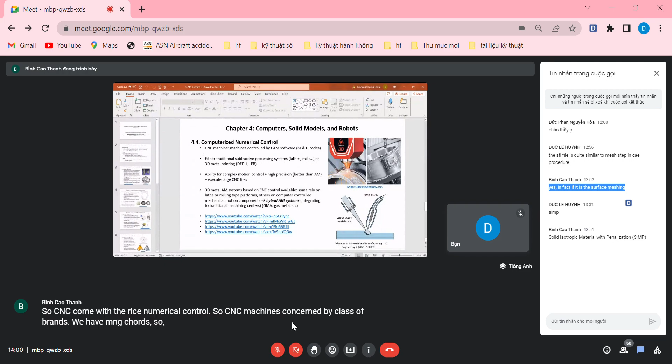So CNC, computerized numerical control. So CNC machines are controlled by CAM software. So we have M and G codes. So either traditional subtractive processing like lathe, mill, cutting, or 3D metal printing with directed energy deposition, laser or electron beam. So I just want to find an example for you.

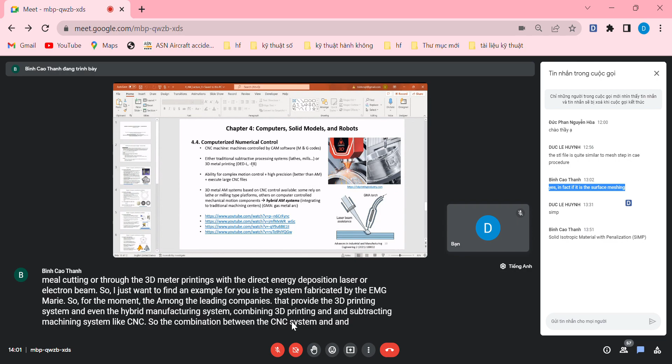This is the system fabricated by DMG Mori. So for the moment, they are among the leading companies that provide 3D printing systems, and even hybrid manufacturing systems combining 3D printing and subtractive machining like CNC. So the combination of the CNC system and the 3D printing system in one system only. That can be offered by DMG Mori in Germany.

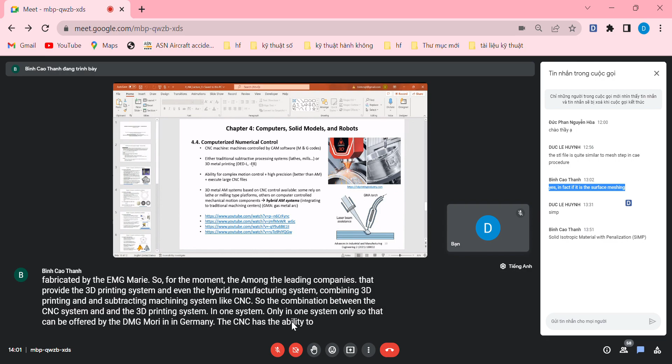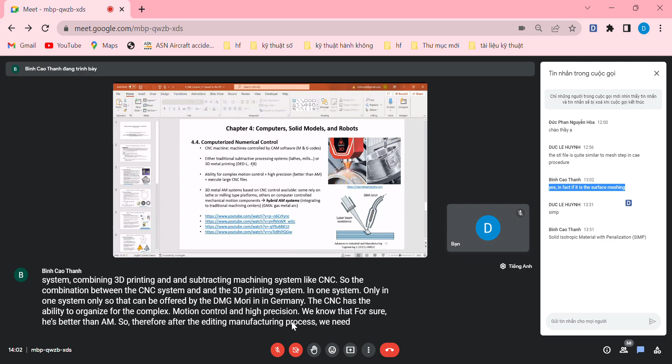The CNC has the ability for complex motion control and high precision. We know that for sure it is better than AM. So therefore, after the additive manufacturing process, we need post machining with the CNC. And it has the ability to execute large CNC files.

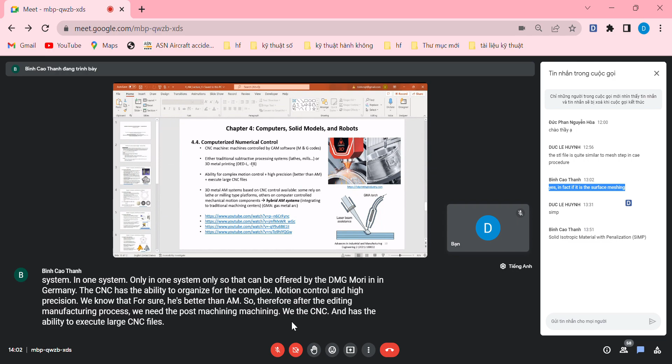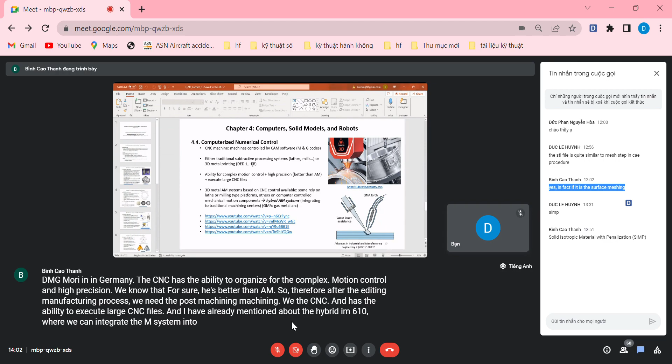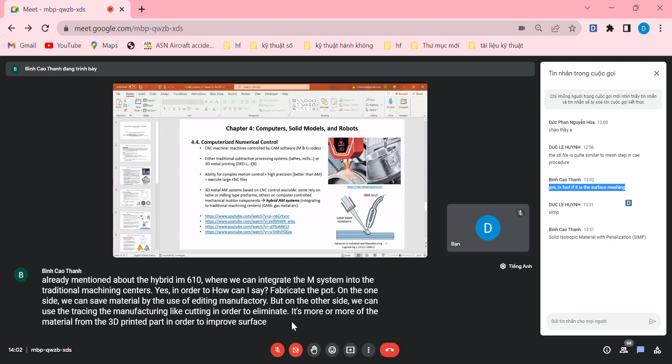And I have already mentioned the hybrid AM system, where we can integrate the AM system into traditional machining centers in order to fabricate the part. On the one side, we can save material by the use of additive manufacturing, but on the other side, we can use traditional manufacturing like cutting in order to eliminate a small amount of material from the 3D printed part in order to improve the surface quality of the fabricated parts.

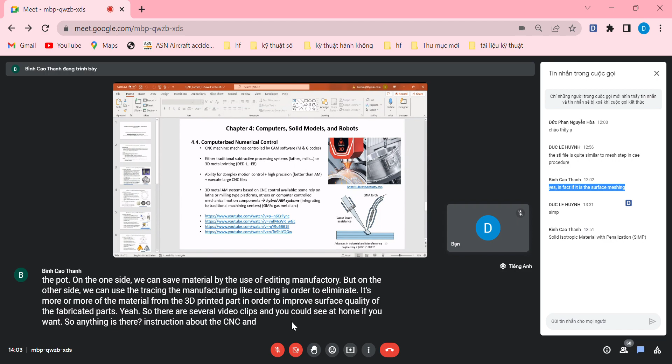Yeah, so there are several video clips you could watch at home if you want. So I think there is an introduction about CNC and probably the combination of the CNC system and additive manufacturing system in a single system.

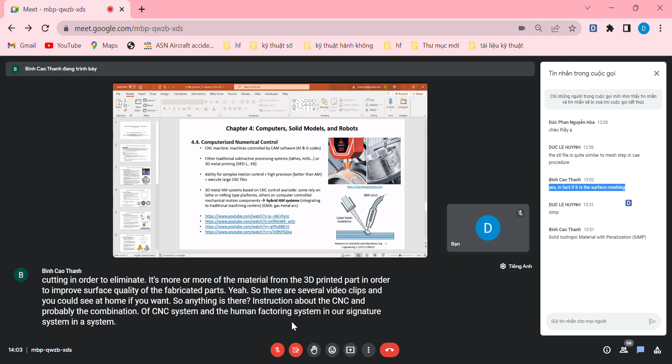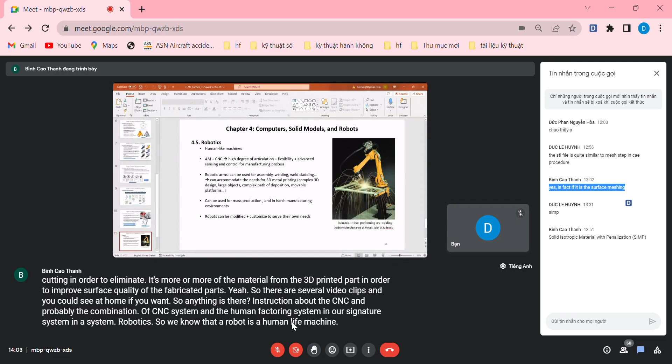Robotics. So we know that a robot is a human-like machine, because, for example, it has an arm. Yeah. So we can call them robotic arms. Yeah. The use of additive manufacturing and CNC offers a high degree of articulation.

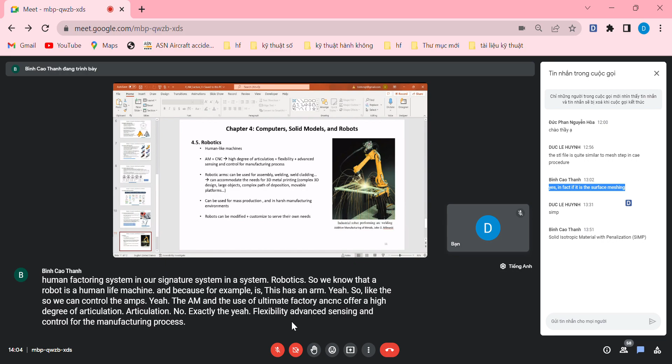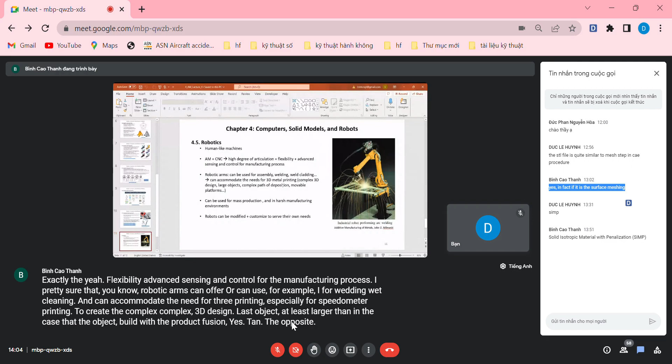Yeah. Flexibility, advanced sensing, and control for the manufacturing process. And I'm pretty sure that robotic arms can be used for assembly, for welding, cladding, and can accommodate the need for 3D printing, especially for 3D metal printing, to create complex 3D designs, large objects, at least larger than objects built with powder bed fusion. Yes, they can deposit the material for complex parts with a movable platform.

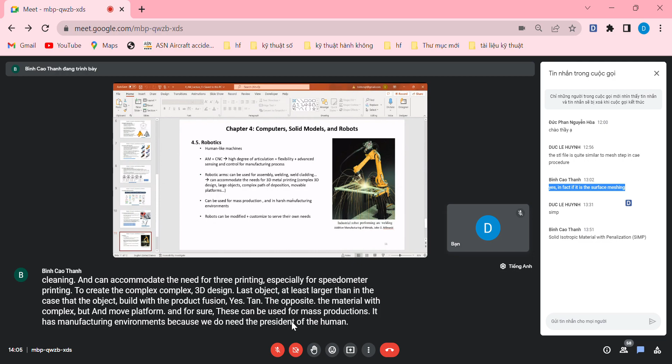And for sure, this can be used for mass production, and in harsh manufacturing environments, because we don't need the presence of the human here. The robots can be modified or customized to serve their own needs, of course. It depends on the purpose of using the robot. Yeah.

So, the last slide highlights some information regarding monitoring and real-time control. Yeah. So one of the examples I could find for you is the patent developed by Norsk Titanium, a company in Norway that used a kind of plasma as a heat source in order to melt titanium wire to deposit on the substrate to fabricate near-net-shape components for the aerospace industry.

Yes, so they have tested their product and they said that the quality of the additively manufactured parts is comparable with wrought titanium. So the properties are quite great. It's faster, it saves material, yeah. So quite suitable for contributing to shape the path toward a more sustainable future, saving materials. Save energy during the manufacturing process.

Yes, and it can create light parts. Yeah. Or improve the efficiency of fuel consumption for several types of machines or even airplanes. Hopefully, the additive manufacturing, yes,

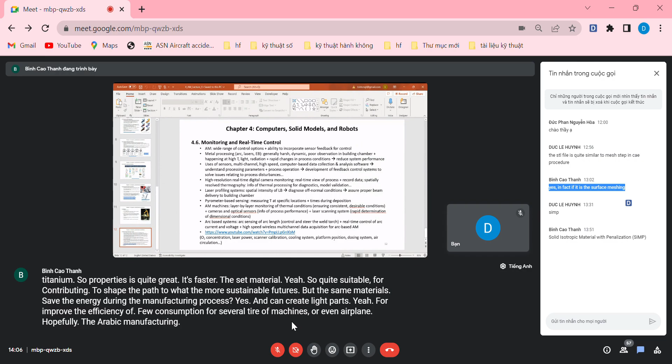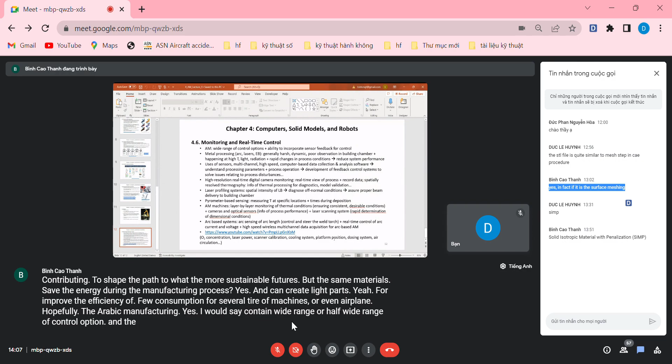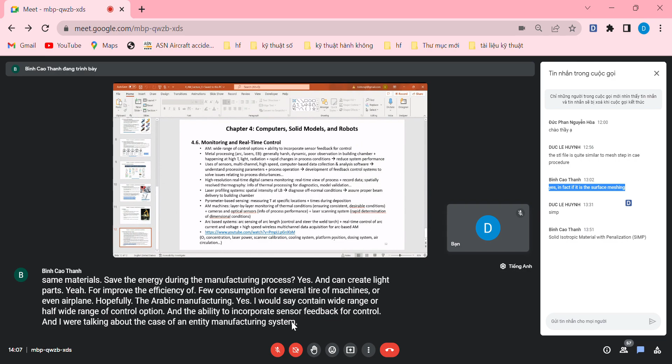I would say has a wide range of control options and the ability to incorporate sensor feedback for control. And I was talking about the case of an additive manufacturing system developed by Norsk Titanium, and their feedback system actually collects 600 data points per second. Yes, in order to control the process of printing.

So if unreasonable parameters have been detected, then the system can modify the printing parameters in order to control the quality of the part after the process. So 600 data points per second. Yeah.

The metal processing by additive manufacturing, using the heat source as an arc, laser, or electron beam, is generally harsh, so it's not friendly to humans. Dynamic, poor observation occurs at high temperatures and inside the building chamber. So how can we observe? It's generally hard to do. It's happening at high temperatures, with light, radiation, and rapid change in the process conditions, and as a result, it reduces the system performance for sure.

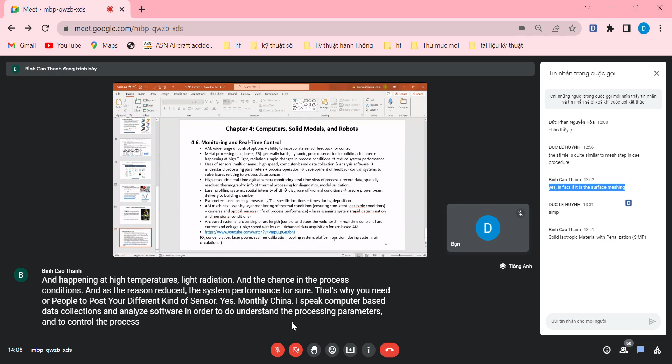That's why people propose different kinds of sensors. Yes, multi-channel high-speed computer-based data collection and analysis software in order to understand the processing parameters and to control the process operations, to overcome or solve any kind of issue regarding process disturbance, to guarantee the quality of the part.

Very understandable. They also equip the AM system with high resolution real-time digital camera monitoring, to provide real-time views of the process and record data. The laser profiling system, the pyrometer-based sensing. Yes, several types of devices are equipped in the AM system in order to monitor the process of printing.

And for the AM machines, we know that we need layer by layer monitoring of the thermal conditions. Why? I do not remember exactly, but within chapter 6 or 7, you will investigate the influence of printing parameters on whether or not you have defects inside the additively manufactured part.

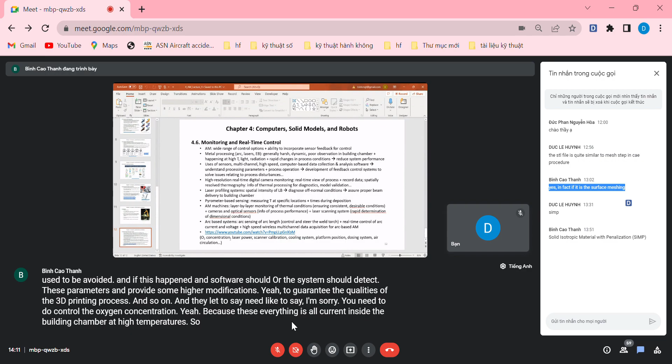And needless to say, you need to control the oxygen concentration, because everything occurs inside the building chamber at high temperature. So without the inert gas flow, it's easy to have oxidation reactions that modify the properties of the material, and you have some kind of rust, which is not good. It's a detrimental factor to the properties of the materials.

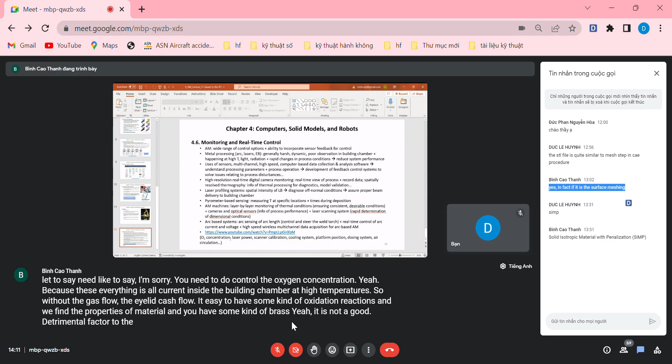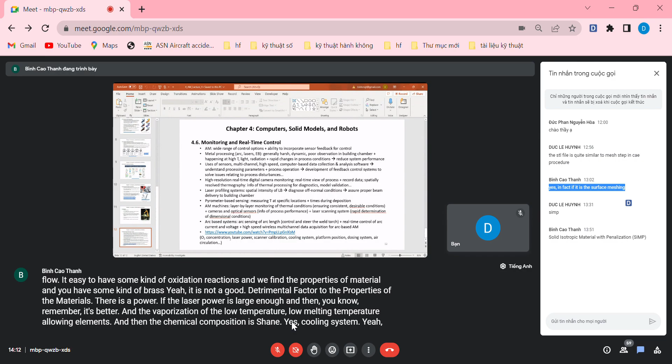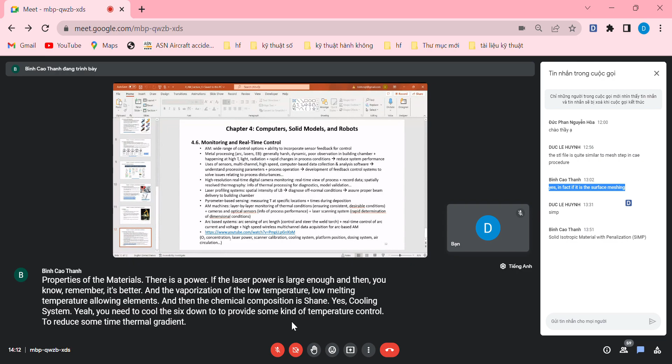Laser power. If the laser power is large enough, remember spattering and the vaporization of the low melting temperature alloying elements, and then the chemical composition is changed. Cooling system: you need to cool the system to provide temperature control, to reduce the thermal gradient. Platform position, dosing system. How to explain this for you?

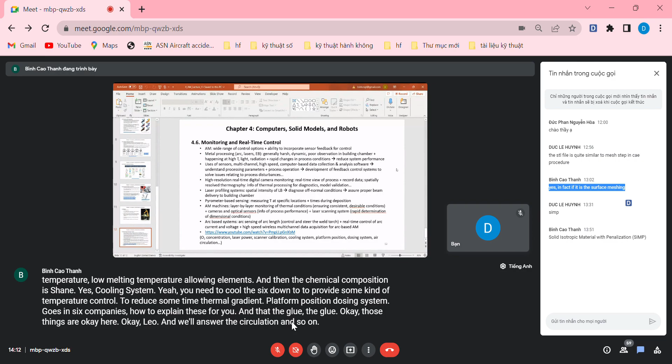So now we can start with chapter 5. I think I will try to complete half of chapter 5 today. And we have 1.5 days left. Next Thursday we have the 7th day, and on the last day we have 2 remaining teaching hours. So I think these hours are enough to complete everything that has been prepared on the slides.

By the way, do you have any questions regarding chapter 4? No? Okay. And please keep in mind that the lectures have already been uploaded on the LMS. Some can contain mistakes, and I will try to correct them as soon as possible.

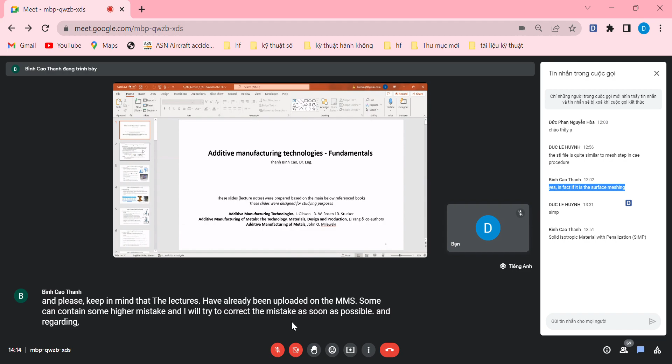Regarding the assignments that you need to complete at the end of the semester, several students have asked me about group work. I would like to remind you that it's not mandatory to do it in a group. But at least you need to define a paper to refer to together, so two students within the group need to refer to the same paper. Once you define the paper, you can work alone and you do not need to care about the other. I encourage you to work together because it's time for you to practice, but it's up to you.

The second thing: probably the class monitor already informed you, or you already read the information on the LMS. But just to remind you, in the case that one student in a group, for any reason, cannot be contacted by the other, or has already left the class, the remaining student has the right to propose the paper to refer to when writing the assignment.

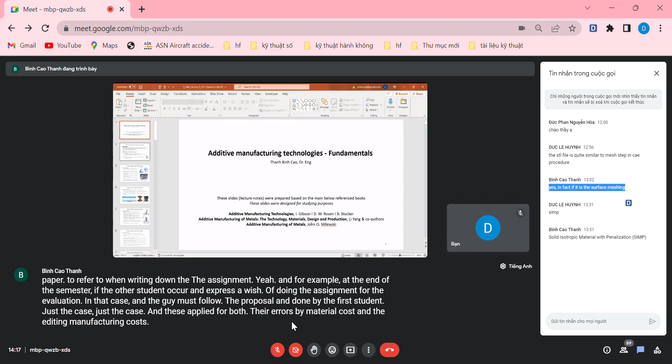And for example, at the end of the semester, if the other student occurs and expresses a wish of doing the assignment for the evaluation, in that case, the guy must follow the proposal done by the first student. Just in case. And this applies for both the aerospace material course and the additive manufacturing course as well.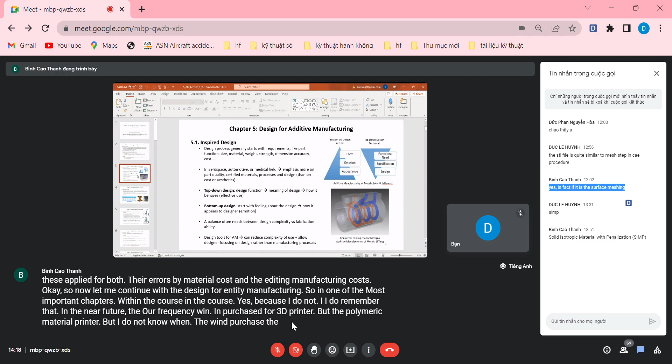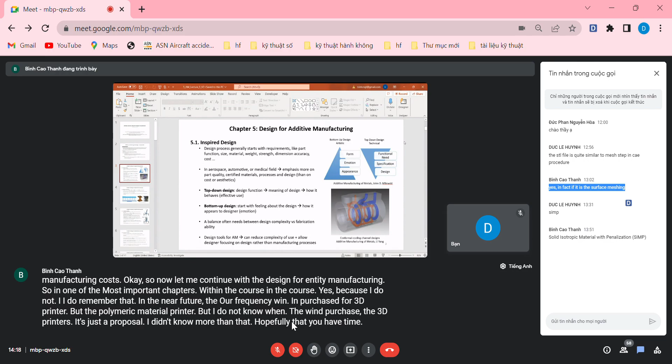I do remember that in the near future, our faculty will purchase 3D printers, but polymeric material printers. But I do not know when they will purchase the 3D printers. It's just a proposal, but I do not know more than that. Hopefully you have time before you graduate to practice somehow with the printer at school or at the academy. Hopefully, just an information.

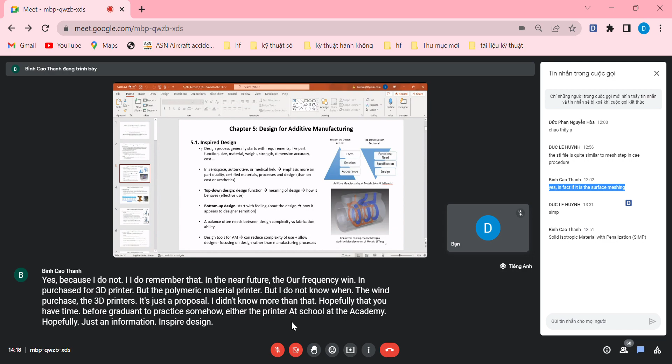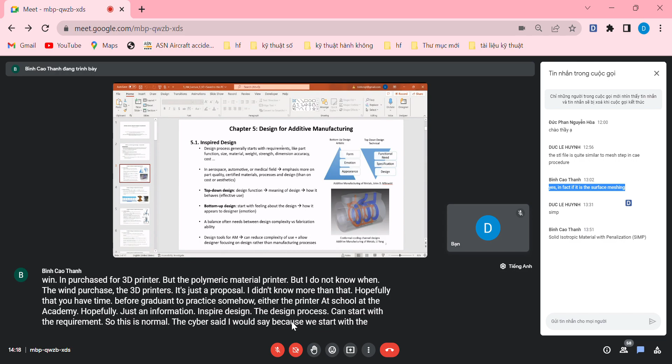Inspired design. The design process can start with the requirements. So this is a normal design process, I would say, because we start with the requirements, containing, for example, the function of the part, the size of the part, the material used to make the part, the weight, strength, dimensional accuracy, or even the cost. And based on the requirements, the designer can design the part to find out which type of geometry of the part will be appropriate.

Sorry. In the aerospace field, automotive or medical field, there is a focus on the part quality. Yes, on the certified material, the process and design, rather than on the cost or the aesthetics. Yes, because the most important thing is to guarantee the performance of the machines. And if the part is expensive...

I'm sorry, I have a call. I need to answer right now. Sorry, for a minute. Okay, here.

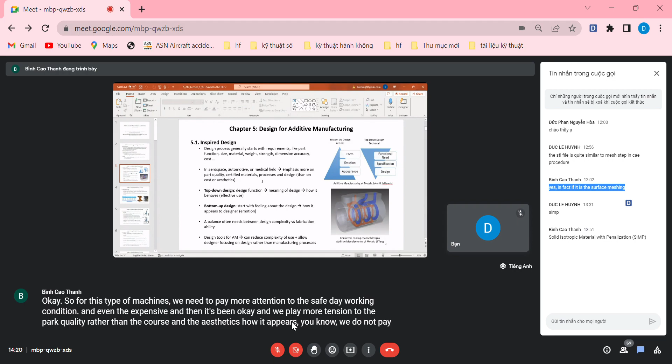So for this type of machines, we need to pay more attention to the safe working condition. And if it's expensive, then it's still okay. And we pay more attention to the part quality rather than the cost and the aesthetics, how it appears. We do not pay so much attention to the aesthetic aspect of the part.

And there are actually two approaches regarding the design process, called the top-down design and the bottom-up design. The top-down design is somehow the engineering design, because we start from the design function, meaning of design and how it behaves. So it focuses on the effective use, or the safe use and so on.

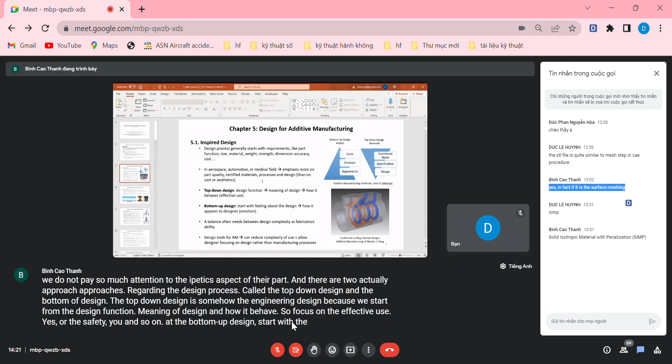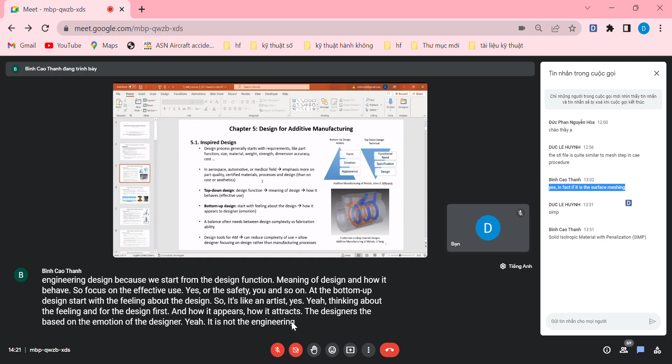The bottom-up design starts with the feeling about the design. So it's like an artist, thinking about the feeling for the design first, and how it appears, how it attracts the designers. So based on the emotion of the designer. And it's not the engineering approach actually. The engineering approach is based on the requirements, based on the function or functionality of the part. And if the part is functioning well, it's okay.

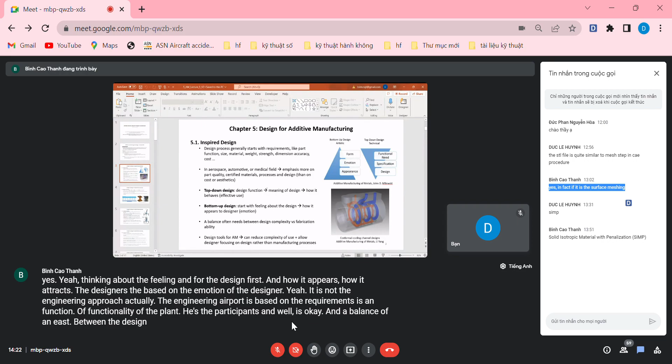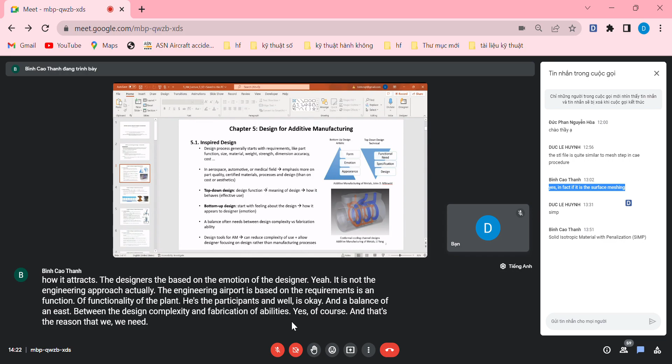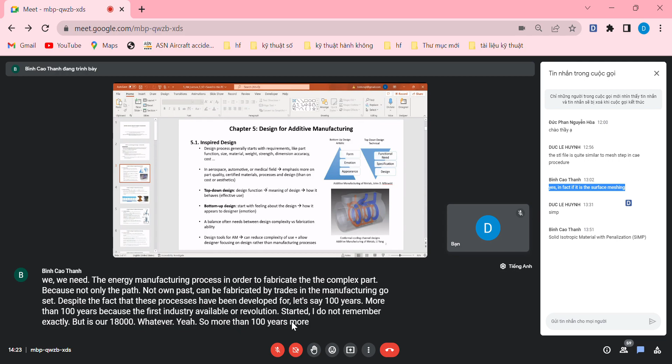And a balance is often needed between the design complexity and fabrication abilities. Yes, of course. And that's the reason that we need the additive manufacturing process in order to fabricate complex parts. Because not all parts can be fabricated by traditional manufacturing processes, despite the fact that these processes have been developed for more than 100 years. Because the first industrial revolution started, I do not remember exactly, but it's around 1800, whatever. So more than 100 years for the development of traditional manufacturing processes.

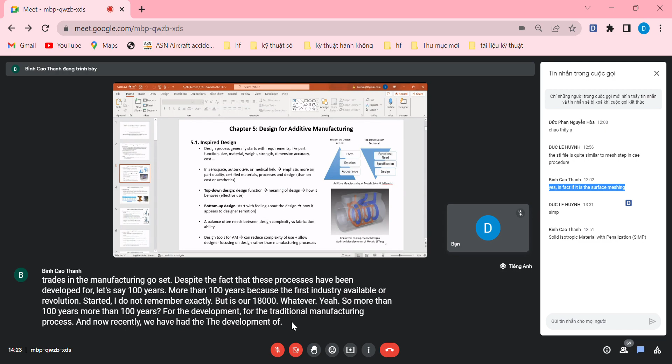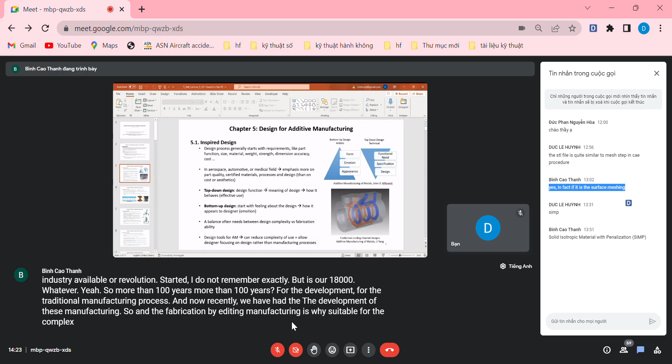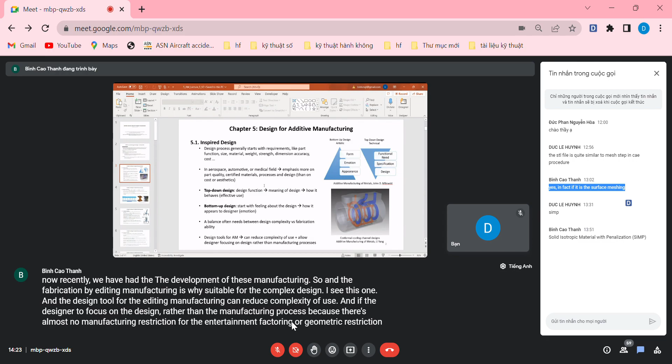And now recently we have had the development of additive manufacturing. And fabrication by additive manufacturing is quite suitable for complex design. Quite suitable. And the design tools for additive manufacturing can reduce the complexity of use and help the designer focus on their design rather than the manufacturing process, because there's almost no manufacturing restriction or geometric restriction regarding the part if the part is fabricated by additive manufacturing.

So as you can see on the right side, traditional manufacturing processes cannot be used in order to fabricate this part. Even if you use the casting process, it would be quite difficult to fabricate this type of part because it has a complex internal flow channel inside. So the drilling process cannot be used.

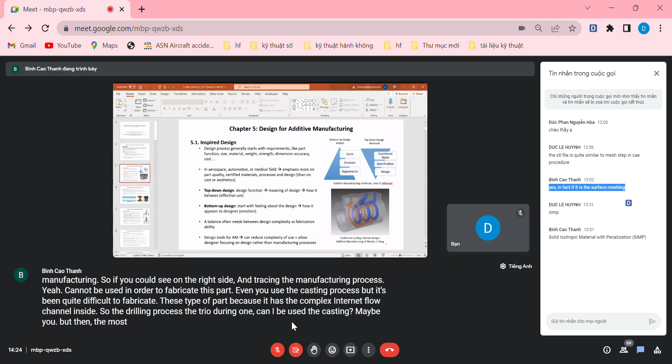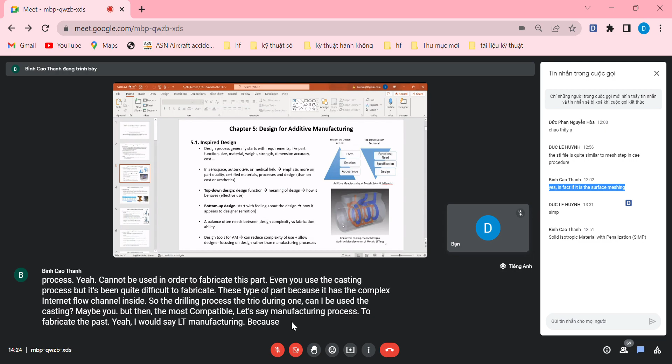Casting maybe, but the most compatible manufacturing process to fabricate the part, I would say, is additive manufacturing, because with the layer-by-layer manufacturing approach, we can fabricate the part, but then we need to pay attention to the anisotropy of the synthesized part or the fabricated part.

It needs to be carefully checked after the part is built.

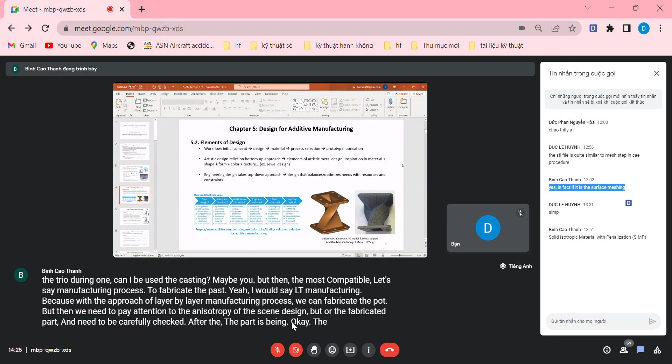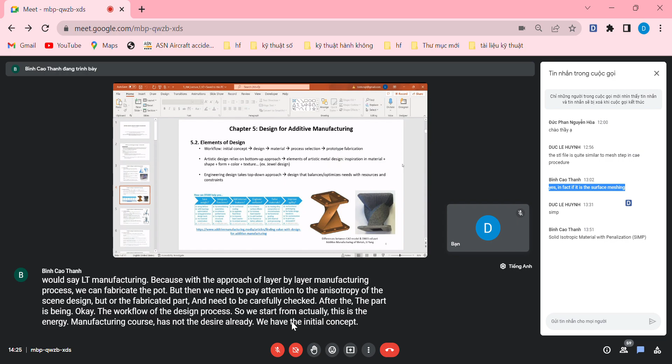Okay. The workflow of the design process. So we start from, actually this is the additive manufacturing process, not the design only. We have the initial concept. Yeah, the initial concept is quite important, and sometimes we need to draw it manually, to define the concept first, and then we start with the design, material selection, process parameter selection, and the fabrication of the prototype.

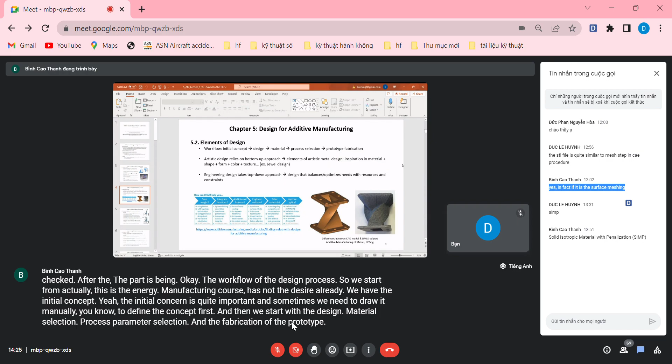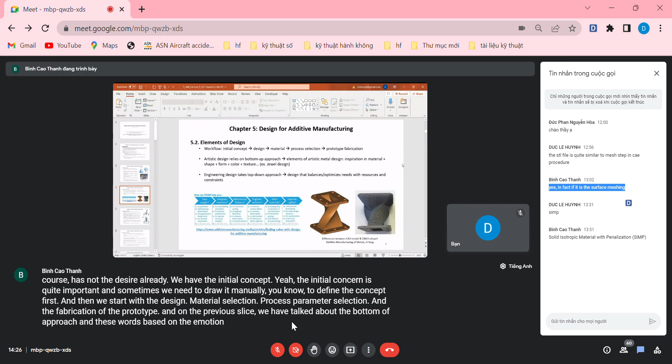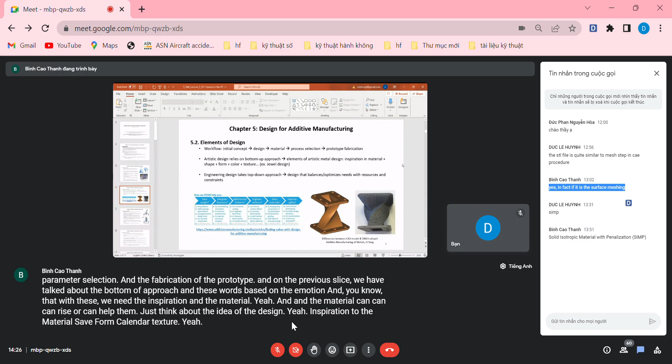And on the previous slides, we have talked about the bottom-up approach, and this was based on emotion. And you know that with this we need the inspiration of the material, and the material can help them to think about the idea of design. Yeah, inspiration of the material, shape, form, color, texture. So, for example, in the field of jewelry design.

So, engineering design relies more on the top-down approach. And we need to find balance with the resources and the constraints. And below you have some kind of flow chart. How can design for additive manufacturing help you save weight, integrate function, add internal features, engineer surfaces, tailor material, and improve agility.

And in saving weight, you can combine the design with structural optimization. We are adding lattice structures instead of using solid material, running topology optimization in order to eliminate unnecessary material, using the generative design tool.

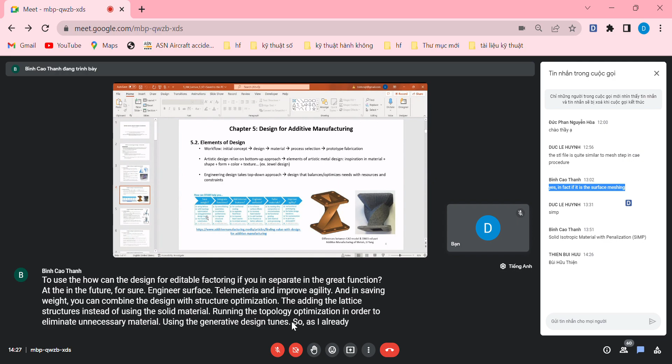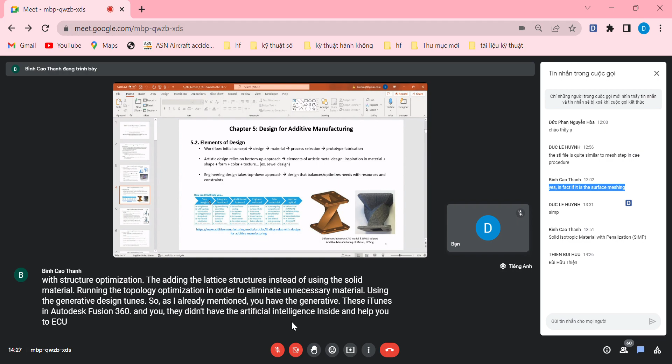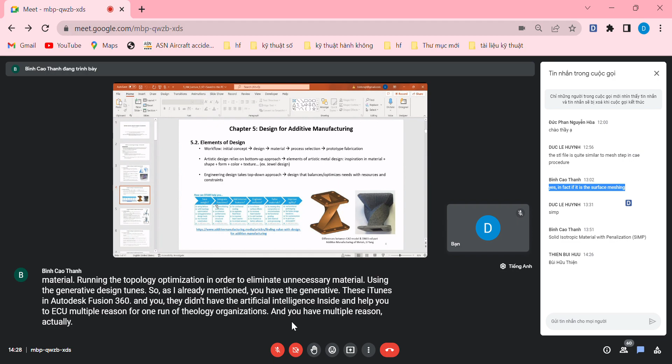So as I already mentioned, you have the generative design tool in Autodesk Fusion 360, and they have artificial intelligence inside that helps you to issue multiple results for one run of topology optimization. And you have multiple results actually. And these results are the optimized structures, and therefore the unessential material has already been eliminated, and therefore you have lighter structures.

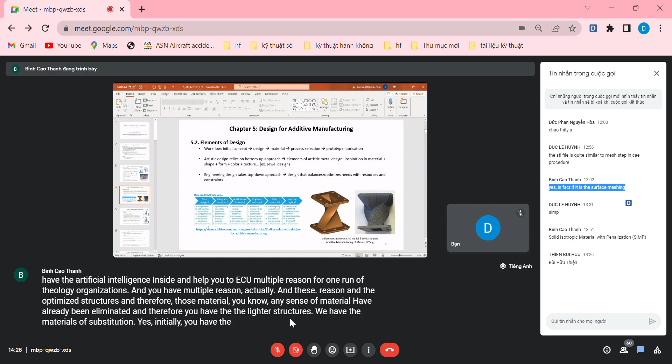Via material substitution, yes. Initially, you have the part made of steel, and now you substitute the material by aluminum alloy. So for sure, because the density of aluminum is just around one third that of steel, it reduces the weight of the part. But it's not actually design for additive manufacturing.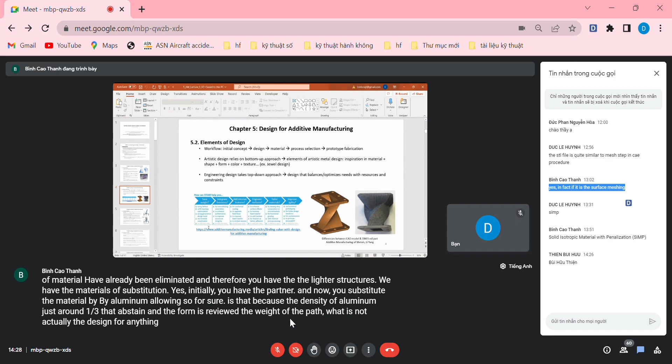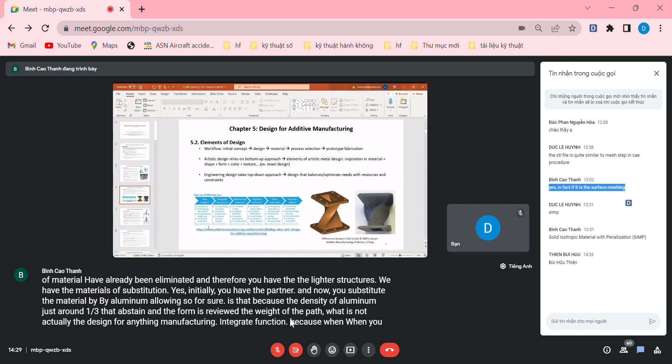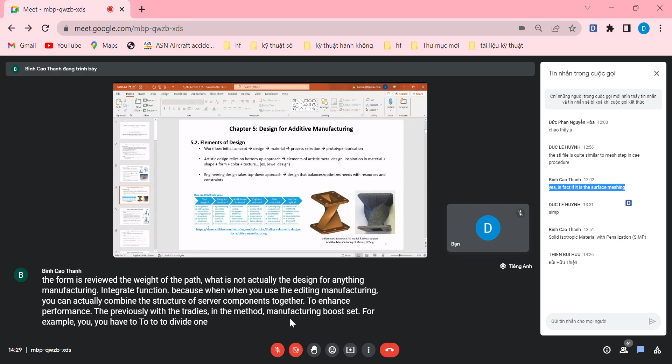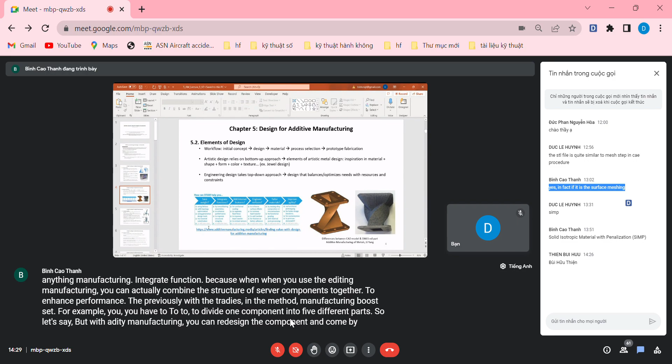Integrate function, because when you use additive manufacturing, you can actually combine the structure of several components together to enhance performance. So previously, with the traditional manufacturing process, for example, you have to divide one component into 5 different parts. But with additive manufacturing, you can redesign the component and combine 5 parts together. Just an example.

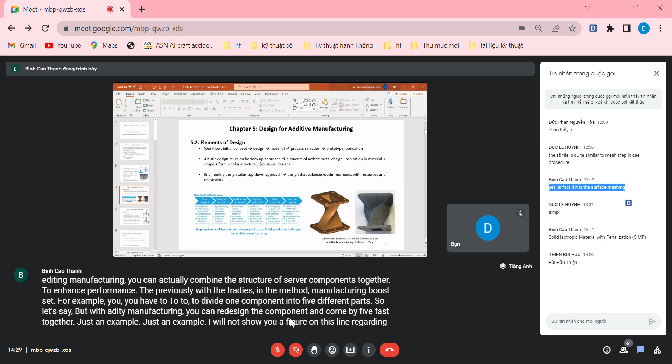I will not show you a figure on this slide regarding integrate function, but simply think of the fact that you can join different parts together, optimize the structures, print out with additive manufacturing, and therefore it helps you to reduce the assembly steps and save the cost for the assembly line. And integrate function, because each part has its own function. When you combine different parts, you can integrate functions into one complex part.

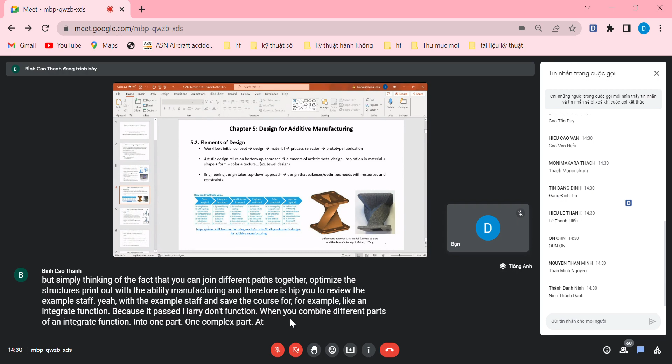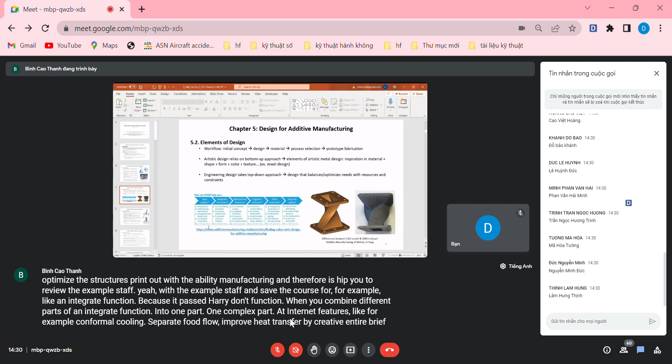Add internal features like, for example, conformal cooling, separate fluid flow, improve heat transfer by creating different kinds of fins, to increase the area for transferring heat to the surrounding environment. So yeah, you can add features for sure.

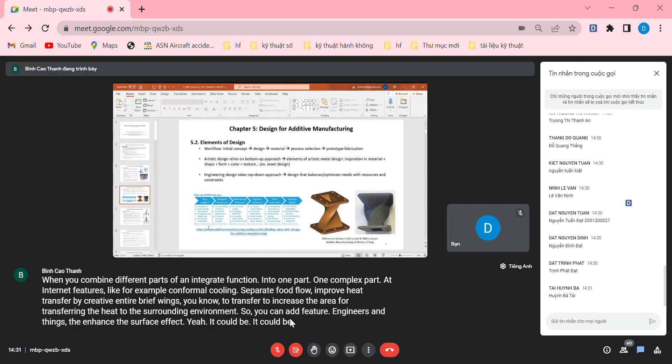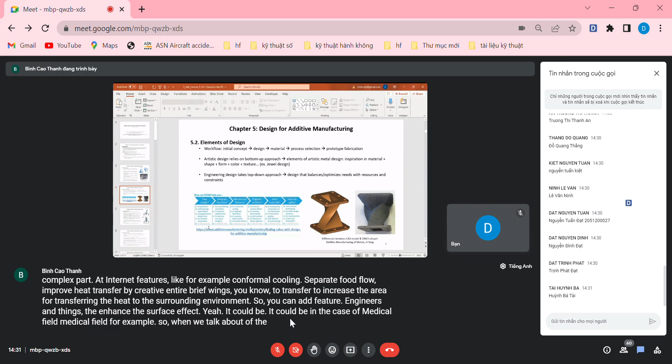Engineer surface to enhance the surface effect. It could be in the case of the medical field, for example. So when we talk about hip joint replacement, there is a component called the acetabular cup. Acetabular cup.